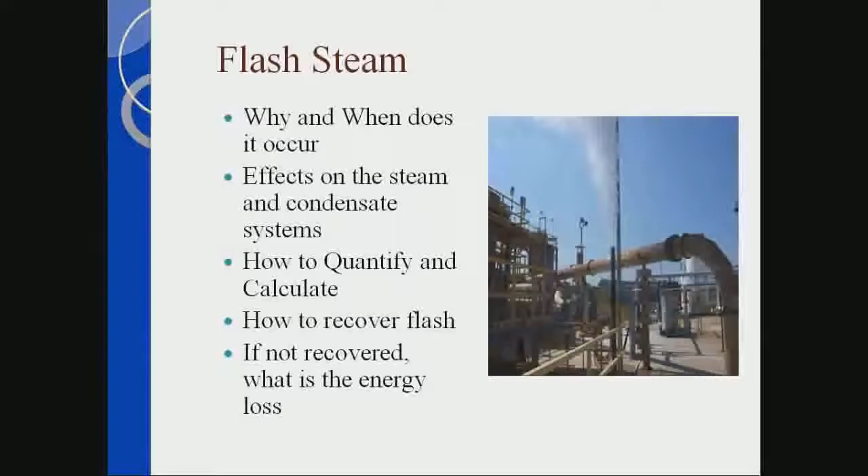Flash occurs—if you look at item 1, that's 100 psi steam coming into the process. 100 psi steam will be 338 degrees. It releases the latent energy, condenses down into condensate, which is also 338 degrees Fahrenheit. Down at point 2 is the condensate going to the steam trap, at 338 degrees. As condensate passes through the orifice of the steam trap, it sees a lower pressure—let's say 0 psig—so the condensate temperature has to come down to 212 degrees.

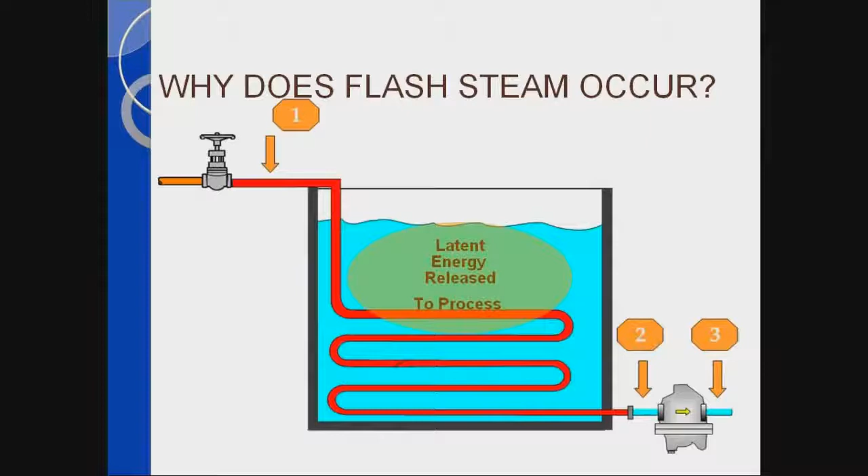How does it get the temperature of the liquid down to 212 degrees? It takes a percentage of the liquid and changes its state from liquid to vapor, or flash steam. For any given saturated steam or condensate pressure, there can only be specific values listed in the steam table—we call it the saturated steam tables. At each lower pressure condition, the heat energy that is released is called flash steam.

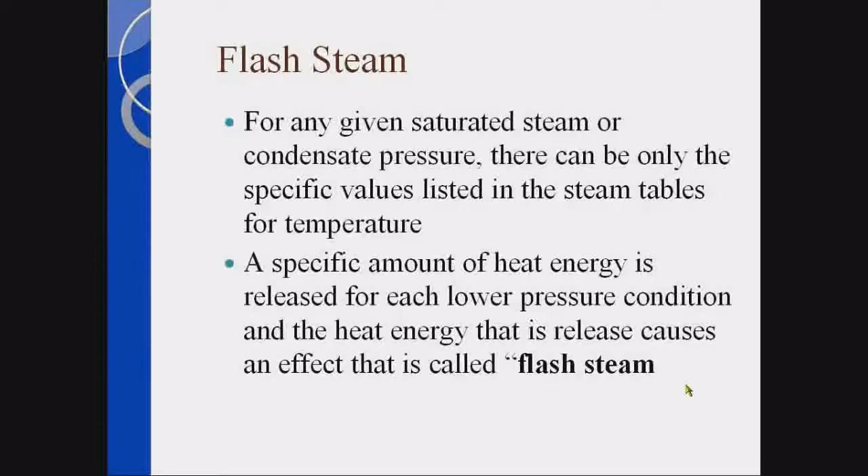Flash steam affects the condensate return line sizing, receiver tank vent sizing, steam system testing, steam trap discharge piping, and energy loss. If loss increases, it increases chemical costs and increases makeup water. And one of the things flash causes is water hammer if condensate return systems are not properly piped.

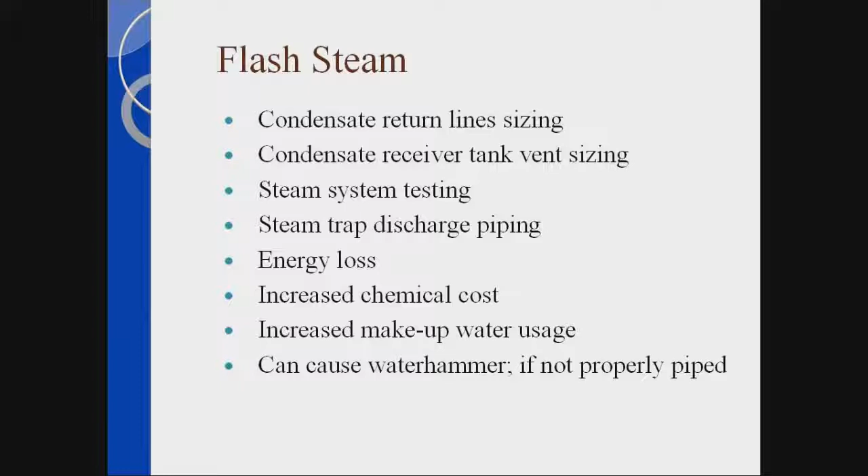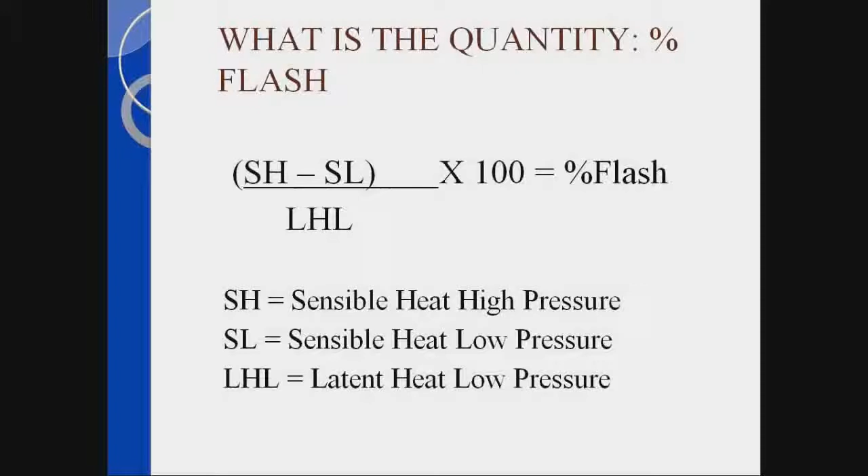How do we come up with the quantity of flash? The simple equation that's been around for years is: SH minus SL, divided by latent heat low, times 100, equals the percentage of flash. The question is, what is SH? That's the sensible heat at high pressure. What's SL? Sensible heat at low pressure. What's LHL? Latent heat low pressure.

Example would be a heat exchanger. We have a control valve that's supplying 100 psi to this heat exchanger. The process is absorbing the latent energy, condenses down into condensate, and the condensate in this condensate piping to the steam trap is 100 psi, or 338 degrees Fahrenheit, discharging into the condensate return line, which is at 0 psi, where the temperature is going to be 212 degrees.

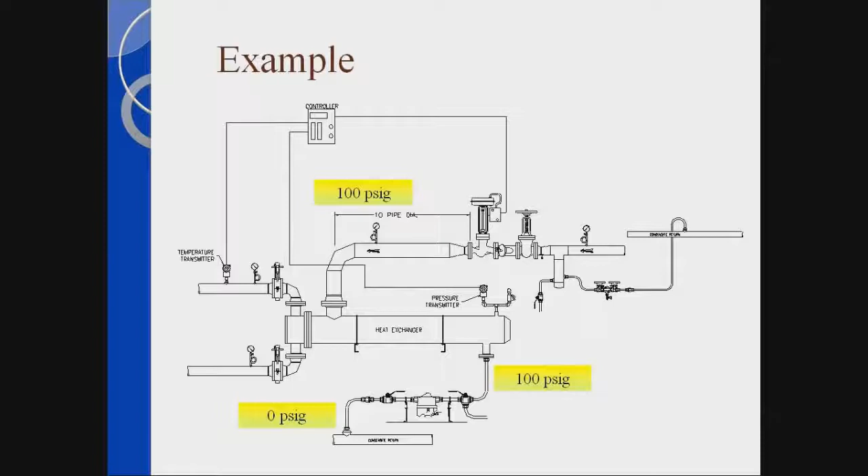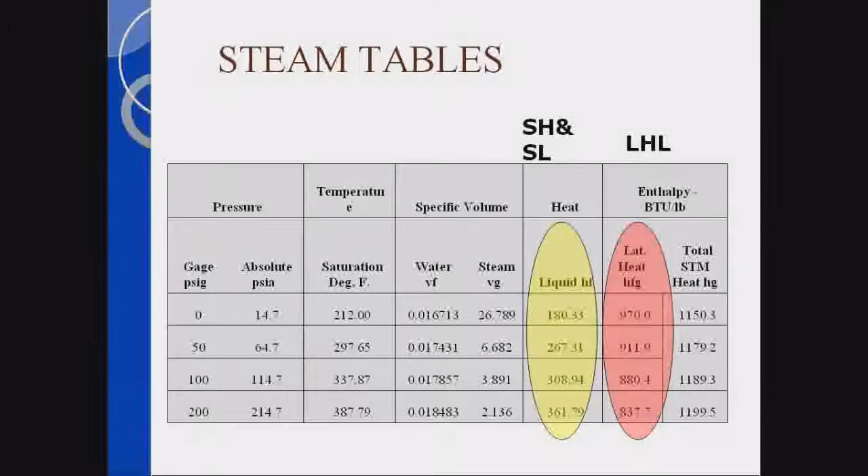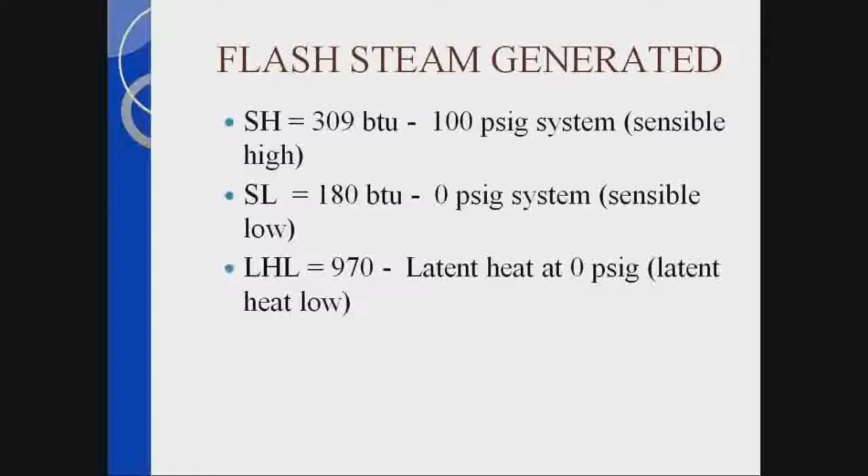If you go to the saturated steam tables and look up the sensible energy of the liquid high, you'll see it's 308 BTU per pound. The sensible low is 180.33 BTU per pound. The latent heat low, LHL, is 970 BTU per pound. Putting this into the equation, SH equals 309 on the high side of the steam trap, and the discharge side is 180 BTU per pound. The latent heat's 970, so dividing that into the equation: 309 minus 180, times 100, divided by 970, equals 13.3%.

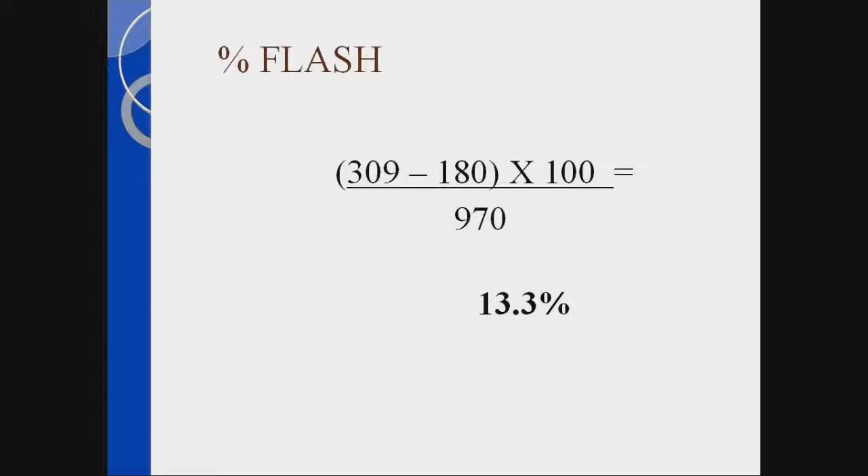What does that mean? If there's 1,000 pounds of condensate flowing through this heat exchanger, 13.3% of the liquid will change state, or 133 pounds of condensate will become flash steam. The other thing to remember is if condensate's passing into an atmospheric system, the flash steam is going to expand somewhere around 1,600 times. Therefore, we have to make sure we compensate the return system for the amount of flash that's going to occur.

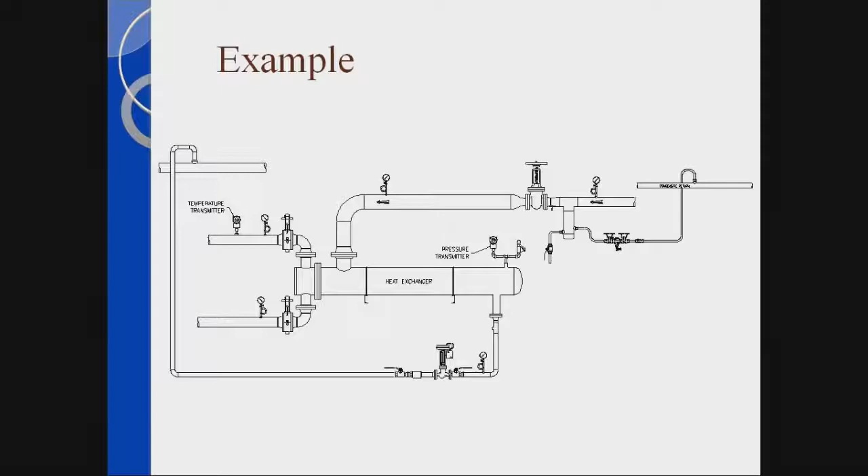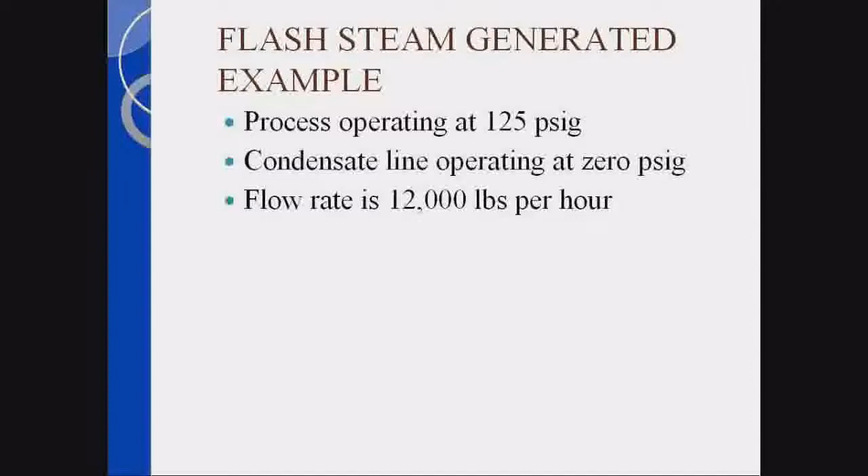Example: here is a process coming in. The steam's coming into this process, going through a control valve and being raised up to the condensate return line. This example is operating at 125 psi. The condensate line is operating at 0 psi G. The flow rate's 12,000 pounds per hour. Going through the calculations again: the process consumption is 12,000 pounds, the process steam pressure is 125 psi G, the steam load is modulating, and the condensate return line pressure is 0. I go to the saturated steam table.

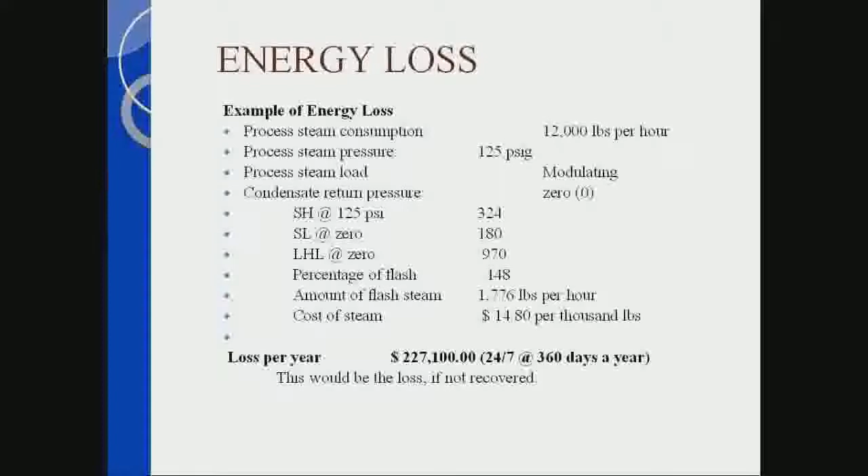SH equals 324 BTU per pound, SL equals 180 BTU per pound, LHL equals 970 BTU per pound. The percentage of flash is 0.148. The amount of flash that's going to occur is 1,776 pounds per hour. Now, if I do not recover that, and the cost of steam is say $14.80 per 1,000 pounds, and this loss goes on 24/7 at 360 days a year, that loss is $227,000 if the flash steam is not recovered. Therefore, these dollar amounts become very high very fast if we're not proactive with recovering flash.

Example here: this is 2,800 pounds per hour, and let's say the cost of steam is $10, operating 24 hours a day times 360 days. This loss right here is $241,920. Unfortunately, we go by facilities all the time, and this venting is quite normal, unfortunately, and the losses are pretty substantial.

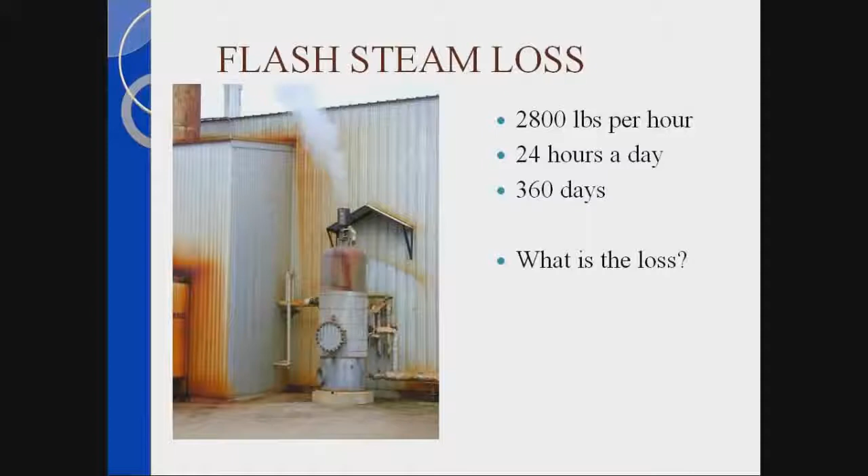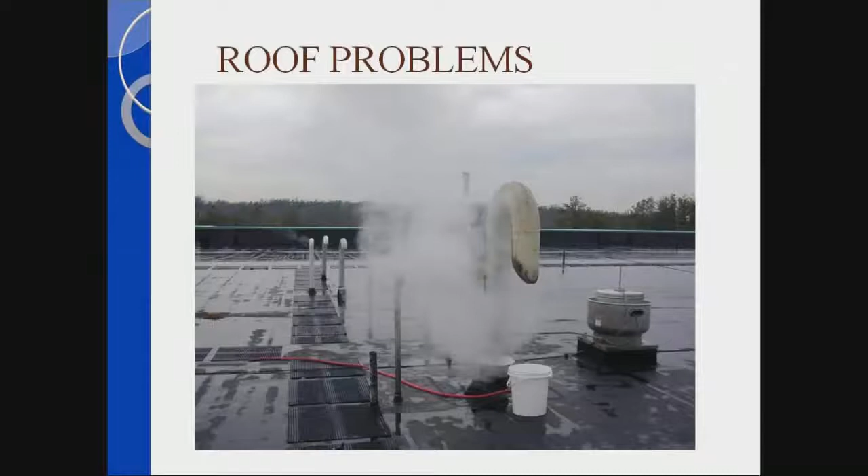Or we have these — no matter where I travel, there's always somebody out there selling pails to collect the condensate that's dripping from leaks or flash steam, like this example. The problem is it causes roof problems if we don't take care of the flash steam losses. In modulating process applications, we have to deal with flash, so we'll talk a little more about that. What are the other problems? Chemical, increased makeup water, damage to roof, ice problems, and safety.

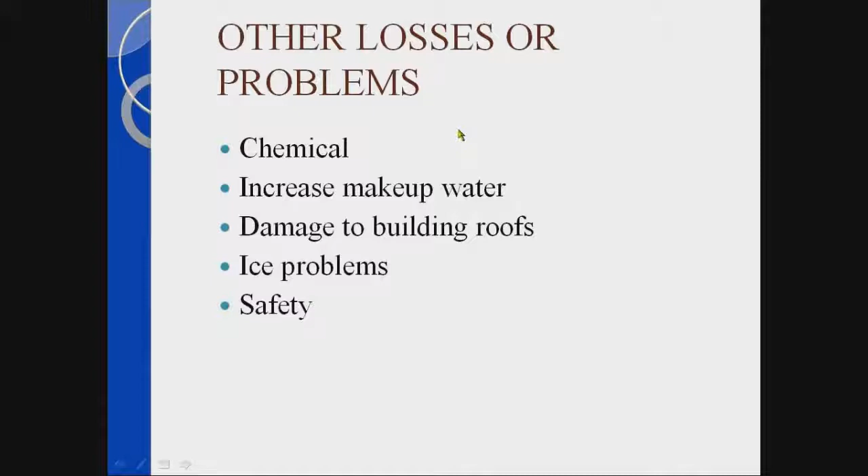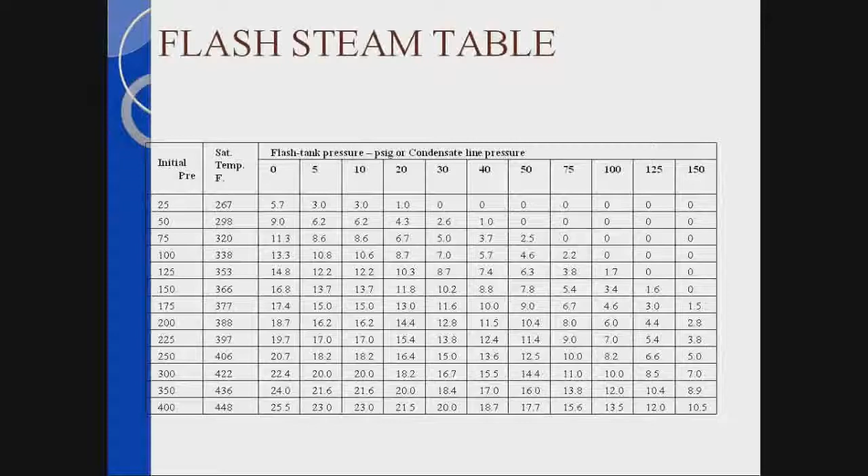We talked about how we've got to have flash. So how do we recover the flash? Say it costs me $200-something thousand — great, how do I recover it? It's a great question. There are two types of systems in steam systems: one is called non-modulating steam process, and the other is modulating. The first one I want to talk about is non-modulating.

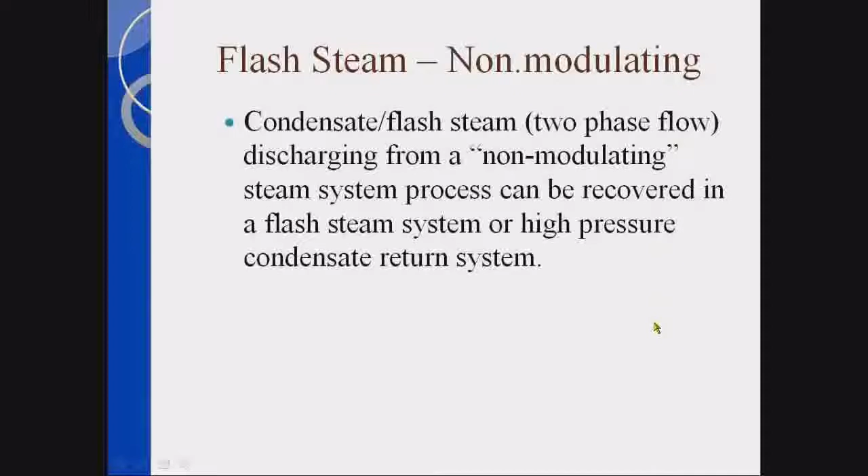That valve is not a control valve. That is an on-off valve. So when the process is operating, that valve is fully open, and the steam is not modulated to the process.

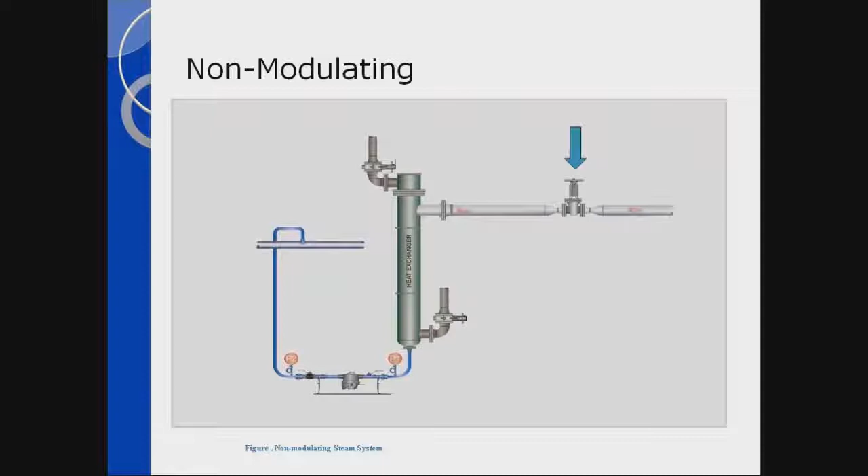In these cases, if you look down at the bottom of the print where we show a steam trap, P1 and P2, we're always guaranteed a differential across the steam trap because the steam pressure is not modulating. Therefore, the condensate return line shown there can be at some elevated pressure, but it has to be lower than the supply pressure. The condensate can be sent back to the boiler plant under pressure.

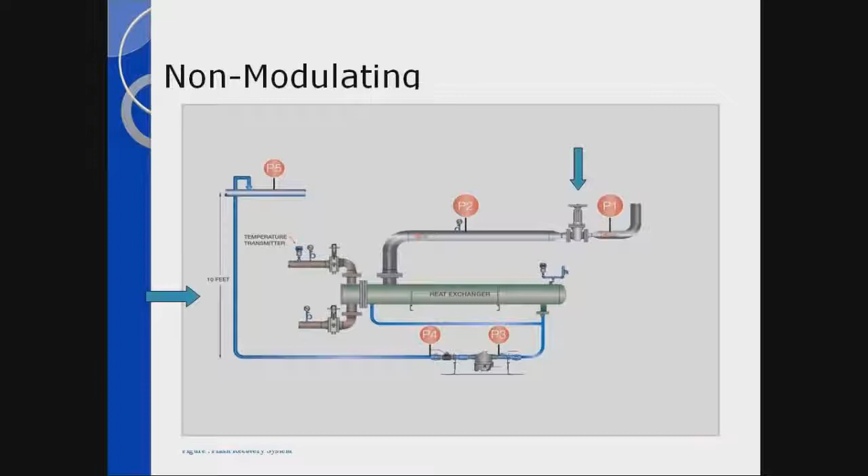With these devices we can elevate the condensate up in the air. On the left-hand side, you see we elevate 10 feet. Just a rule of thumb, every foot rise is half a psi, but I have plenty of differential to work with because we're not modulating the steam.

Flash steam from the condensate discharge can be directed into another low-pressure steam user. We call it cascading. With a high-pressure condensate return system, the percentage of flash is greatly reduced. The higher the pressure in the return system, the lower the amount of flash that will occur. Therefore, in plants where we go to high-pressure return systems, we reduce the amount of flash and elevate the sensible energy in the condensate.

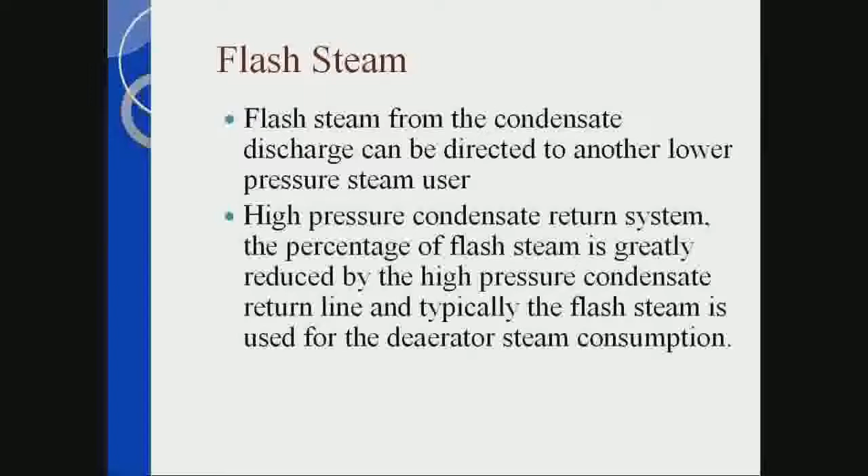With this type of operation, we typically do not go back to the deaerator, we go back to a high-pressure receiver and it's directed back into the boiler. Remember, if you do not allow the condensate to be exposed to the atmosphere, you do not have to go through the deaeration process.

Non-modulating flows, where can they be from? One great example is steam tracing systems. They do not modulate the steam to steam tracing. Drip leg steam traps, specifically like a high pressure 200 psi, we take that condensate and direct it back into a high pressure receiver or to the storage side of the deaerator. Another example is process unit heaters, process heaters, reboilers, corrugators.

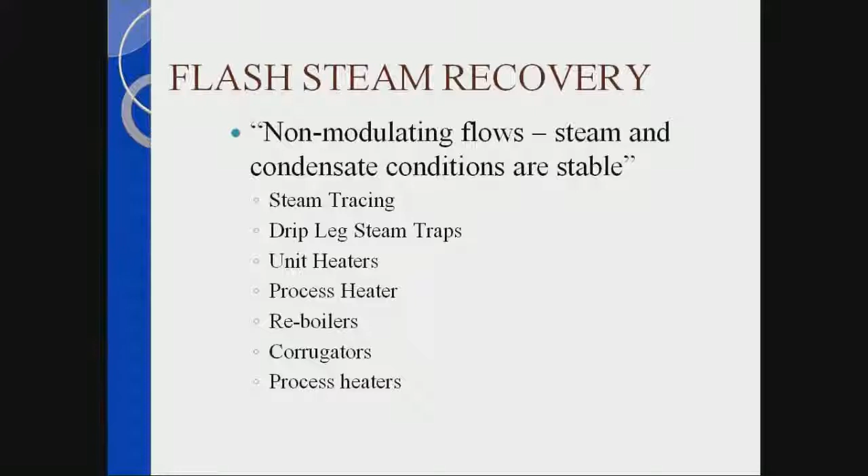All these are examples of steam flows that do not modulate, which we can direct back into a pressurized return system or a cascade system. Directing these flows back into a cascade system or a thermocompressor system, we must basically separate the condensate from the flash. That's why we put in flash tanks. Flash tanks have to be properly sized and installed.

The thing is, where do I take that flash steam? I can take the flash steam to a heat exchanger to heat water, air, or any other liquid, or direct it into processes with a lower pressure steam requirement. The thing about the flash tank is the separation of condensate and flash.

The other thing is we control the flashing process by the pressure in the flash tank. Also, in the calculations of a flash tank, you need to allow enough space for the flash to occur, and there are certain calculations we go through to do that. The other thing is to reduce the velocity of flash steam to ensure no condensate carryover with the flash. We have to make sure the flash does not carry any condensate with it or reduce the steam quality to the process. This all comes into the calculation process.

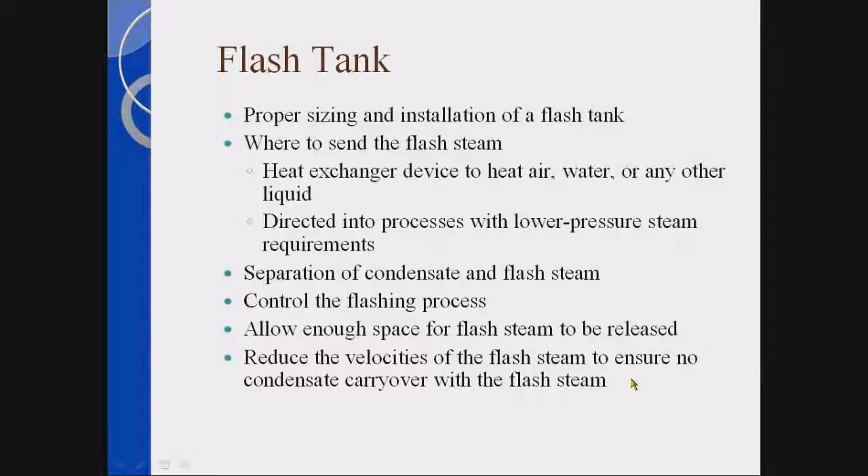Tanks can be mounted vertically or horizontal. The most important dimension in the design of a flash tank is the internal diameter. Again, it needs to be large enough to ensure low discharge velocities of flash to minimize condensate carryover, and to have enough surface area to release the flash from the condensate.

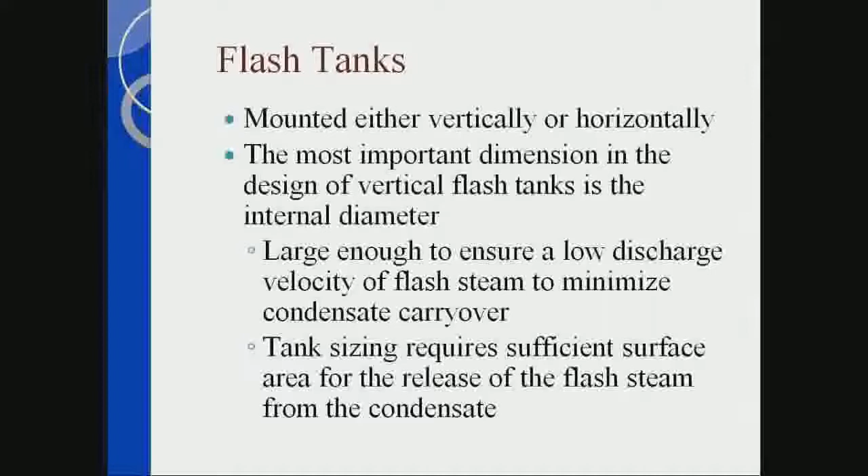One of the things that comes up quite a bit: if the condensate line is properly sized, then we'll get separation of the flash from the condensate in the condensate return system. Unfortunately, most condensate lines are undersized instead of being properly sized or oversized. So therefore, we have to rely on the flash tank to do the separation of the flash from the condensate inside the tank.

The other thing that needs to be looked at is the outlet velocities of the flash tank. Make sure we're not exceeding 3,000 feet per minute. That means we are dropping out the condensate from the flash. Again, a high percentage of condensate in industrial operations is not properly sized. Therefore, the flash tank has to provide the proper area for the condensate to release the flash steam.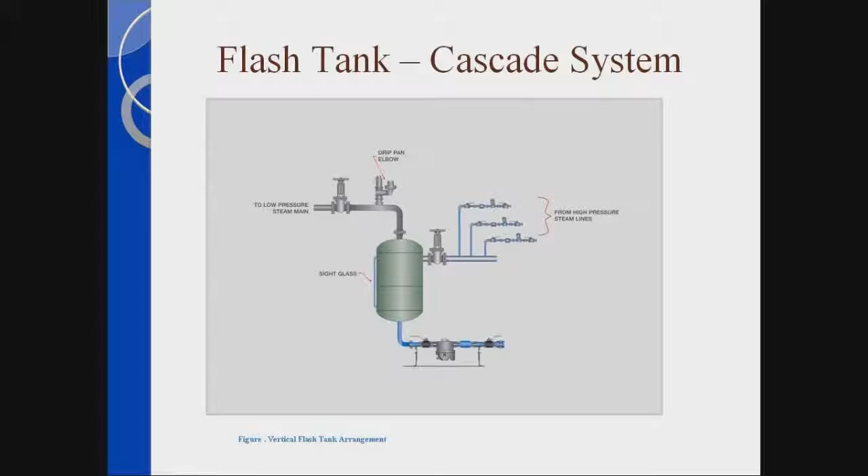Here's a picture showing a flash tank. As you can see, it's a smaller tank with a steam trap piped off the side of it. The flash is exiting the top part of the tank.

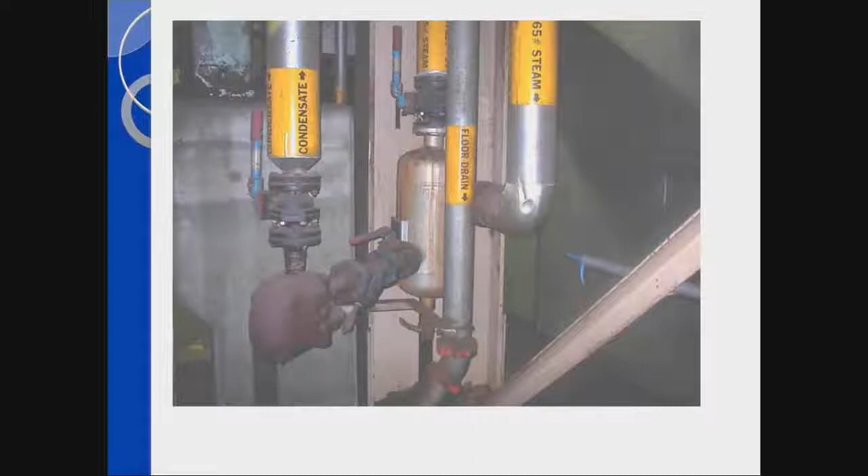Here's a larger tank assembly. This is taking volumes in about 40,000 pounds per hour, and the flash is exiting at the top here. The condensate, as you can see on the lower left-hand corner of the slide, is being pumped back to the boiler plant.

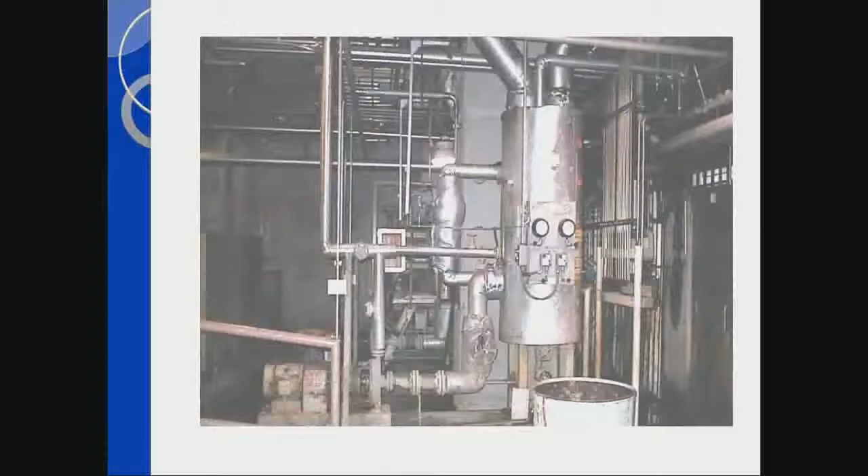The other thing, a question always comes up in comments from plants: we don't have use for low pressure steam. What can we do? The thing is, with low pressure systems, we can thermal compress the steam. Therefore, we can take the low pressure steam and thermal compress it to a higher usable steam pressure.

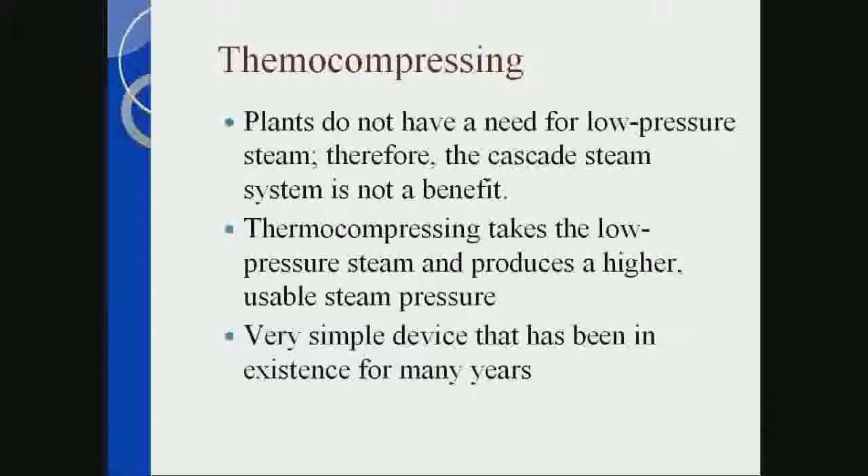A lot of times I hear a comment, is this new? It's been in existence for 60, 70 years. Certain industries used it for many, many years. Other industries have not used it.

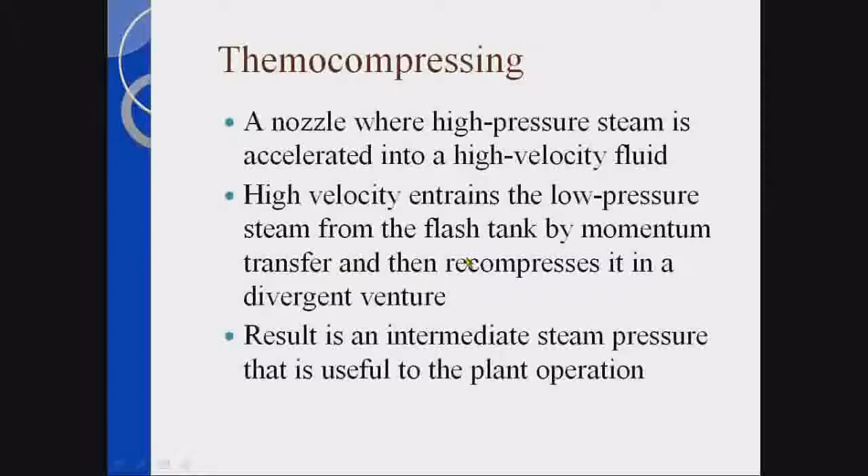The thing with the thermal compressor is basically a nozzle where high pressure steam is accelerated into a high velocity fluid. High velocity entrains the low pressure steam from the flash tank by momentum transfer, and then recompresses it into a divergent venturi. The result is an intermediate pressure that's useful to the plant operation.

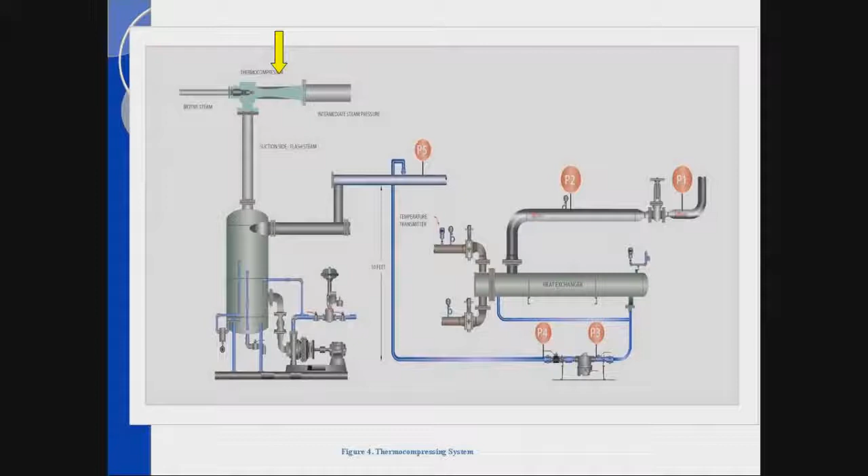It's a great way to make usable flash when I do not have the ability to use low pressure steam. The roadmap we want to follow is to define all non-modulating steam processes. Determine whether we can cascade it or thermal compress it or take the steam to a condenser type system, but recover the flash steam. Remember, if I'm venting the steam to atmosphere, it could be $200, $300, could be $700,000 a year.

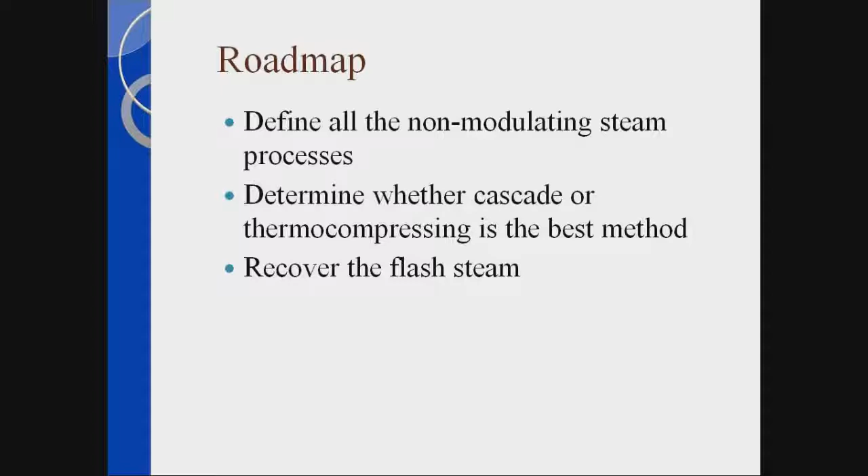Can't do that today. The other steam process I was talking about is modulating flows. Steam and condensate conditions will change and are not at a steady state. The modulating system has a modulating steam control valve to the process because the intent is to maintain temperature of the process.

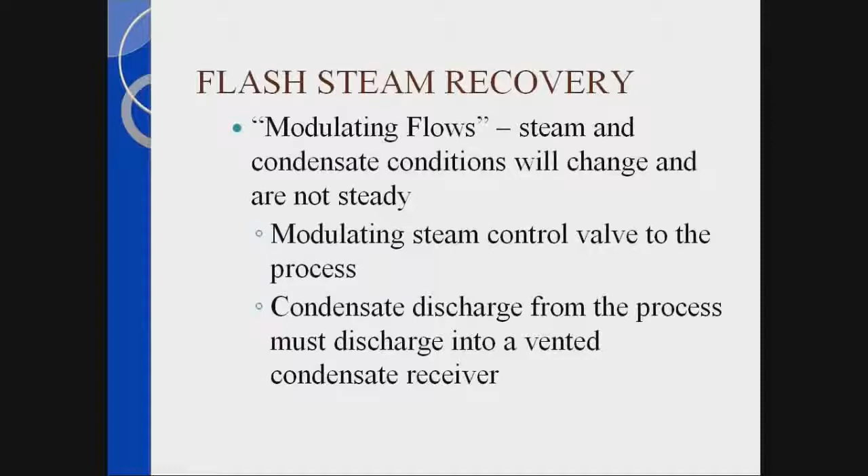Condensate discharge from the process must discharge into a vented condensate receiver. In process applications, the control valve is going to travel anywhere from 0 to 100%. Really it's controlling pressure of the steam to the process to maintain a process set condition. The steam trap or condensate control drain device does need differential. So as I come down to low pressures, I cannot afford to have back pressure onto those drain devices.

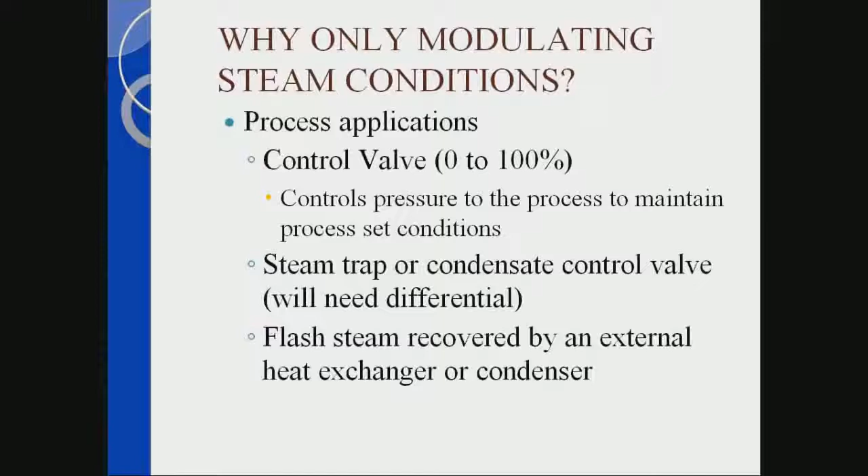The problem with this is flash steam recovery has to be done by an external heat exchanger, or what we call a condenser.

An example is on here. This is a modulating load. As you can see, P1, P2 - the yellow arrow is showing the control valve. That control valve can modulate anywhere from 0 to 100%. If it modulates down to, say, 5%, then P3's pressure is going to change. If it opens to 50%, P3, which is the inlet to the steam trap down to the lower part of the slide, will change.

The thing to remember is that coming out of the steam trap, or P4, going to the condensate header, which is P5 - P5 must be 0 PSI. To make this process work, P5 has to be 0 PSI. One of the problems we find in process applications is pressure at P5, which puts pressure at P4, and we lose differential when the valve modulates down, which will back up condensate and cause water hammer. So remember, when you're putting a system in, P5 must equal 0 PSI.

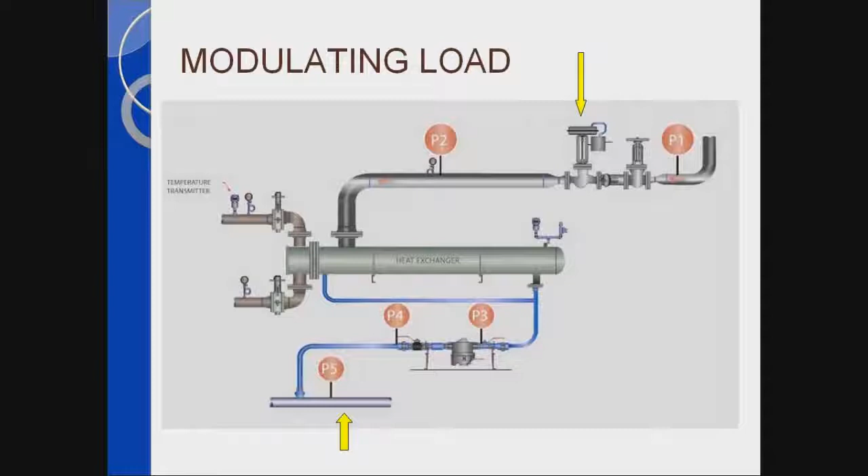Therefore, we bring the condensate into a tank, and these tanks have different names depending on the industry. One industry calls them condensate tanks, another calls them condensate hogs, another calls them flash tanks. There really are flash tank, condensate tank - same thing.

We're doing the same thing as in non-modulating loads, allowing the condensate to be separated and the flash to be vented. Different than the flash tank we discussed, the outlet velocities have to be very low to make sure we get no carryover condensate going out the vent. We also have to make sure we have separation - we want condensate to drop to the bottom of the tank and be recovered or pumped back to the boiler plant.

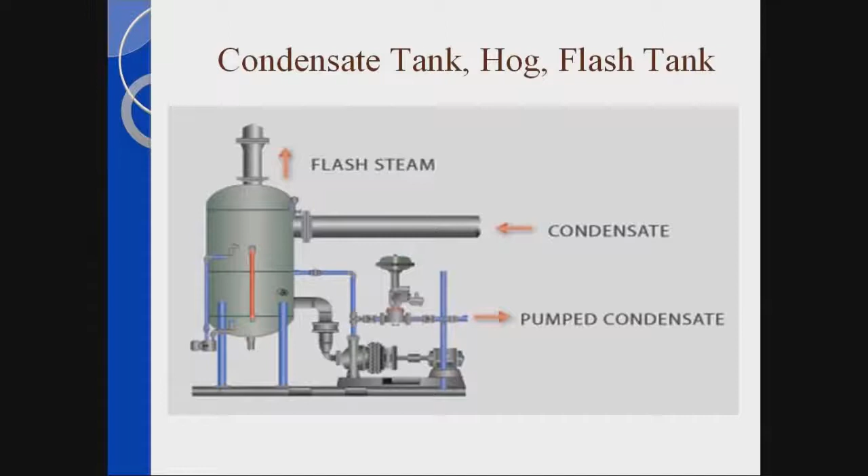To recover this becomes a little more difficult, because this tank pressure, as shown in this diagram, has to be 0 psi. So if it's 0 psi, I cannot cascade it, and it's very difficult to thermocompress it. Therefore, to deal with it, I go into a condenser.

The condenser takes process fluids into basically a shell and tube heat exchanger, designed specifically for a condenser application. The flash steam is allowed to flow up into the condenser. The latent energy is absorbed by the process. Condensate is formed, and drains right back into the tank. The end result is that flash steam is not vented to atmosphere - at the top of this configuration, we'd want to see no steam being vented.

Now, condensate can be pumped, as shown here, through variable speed drive pumps or control valve pump applications like this, maintaining level into the tank. But remember, the same philosophy in condensate tanks as we apply in flash tanks is the same calculations - we want separation, we want the flash to be separated and vented at very low velocities.

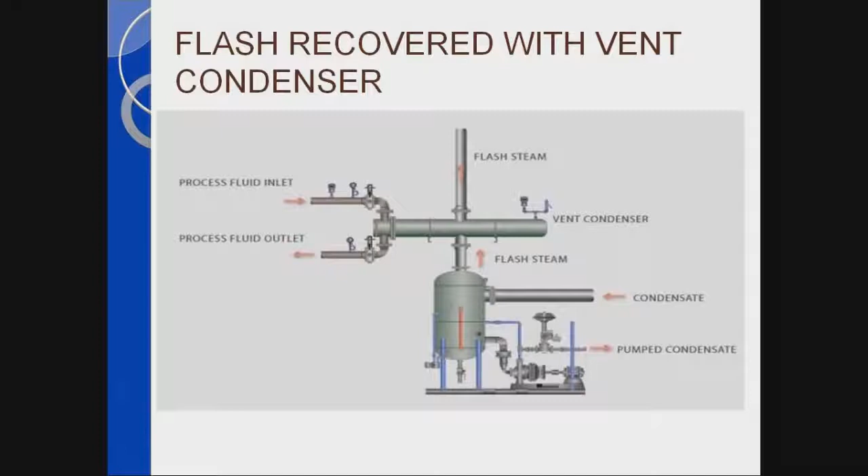The other thing we apply, specifically in areas with heating needs, the northern climates, is to put in an air heater, simply shown here. We allow the flash to come into this air heater, and we absorb the flash steam by heating up the air. With these units, we've done process air heaters too, where we've taken properly sized coils to condense down the flash and preheat the air for the process.

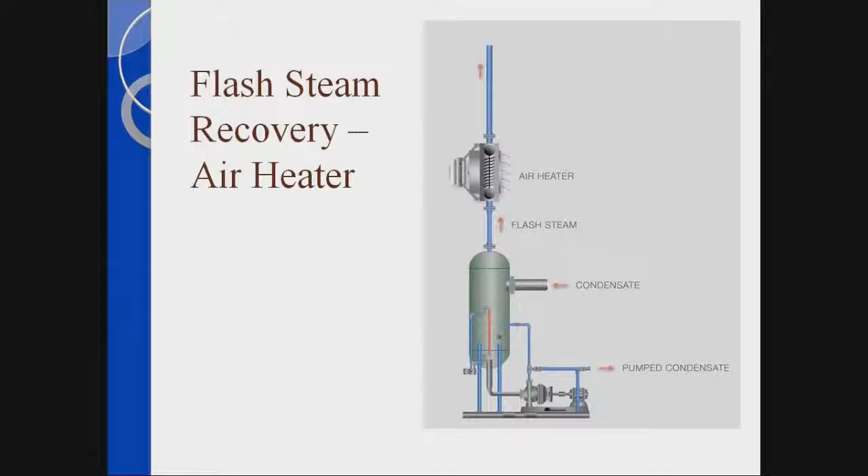I'll give you an example. I was at a facility last week. We were in a cool area, down in one production area, and the vent for the condensate tank system was right there. By just putting in a simple air heater, as shown in this print, we can collect that flash, or recover that flash energy, and provide heat for the building. They said the heating is on for about 185 days a year, which is a lot better than heating the outside air, which is no use to anyone. So this is just another way of accomplishing recovery of the flash steam.

Very simple method. Kelly, without interrupting you too much here, how much steam is vented? How much flash is vented to atmosphere? Just if you had to take a guess, if you walked into your average plant, would you expect to find it or not?

Are they in North America? In North America, probably more than 80% of the plants are venting steam. Wow, really, that's quite high. Yes. All right, I'll let you continue. If you go to other parts of the world, it depends on the country, and that percentage drops dramatically.

But anyway, when you come into facilities, the discussion I was having this morning is, I need a heat sink - what is a heat sink? Something I can take the energy of that flash going to atmosphere and absorb it. One is domestic water, for showers or things like that, depending on the campus setting. You can use it for heating up water, process waters - for example, in the paper industry, we heat up white water. Great heat sink - you need to heat tons of water, so it becomes very viable to do it that way. Process fluids, any fluid I have to heat up to some temperature, 190 degrees, it's great.

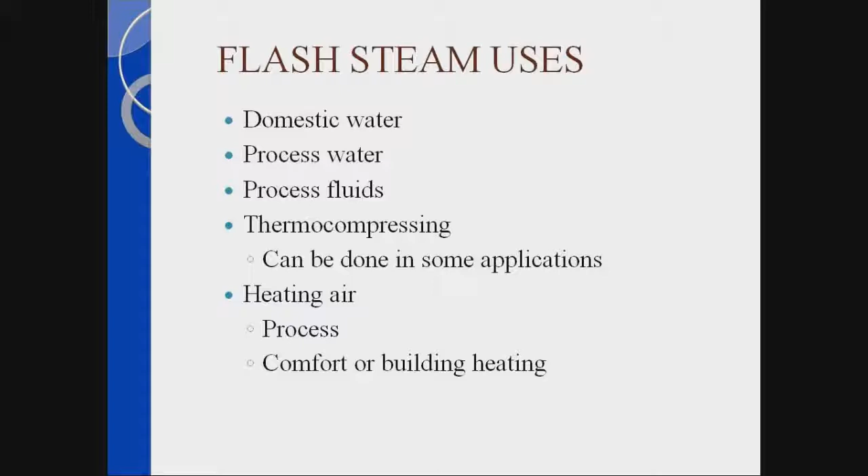The other thing is heating up air. A lot of times we think condensers, we've got to heat up a liquid. Think about heating air for a process, or even heating air for building heating and comfort. Usually the condensers or condensate tanks are sitting in areas where people are, in the production areas, where we can heat up air. So it's quite viable.

Kelly, can I interrupt you again? We have a question. Sure. Somebody was asking, Gary—actually, other Gary, not me—is there a flash tank or other heat collection device that you can attach to the vent line that is set for oxygen removal?

I didn't catch that, you want to repeat it? They want to know if you can get a flash tank or collection device that also will remove... Oh, on the DA, he's saying. Oh yeah, great, great question. See, I didn't even understand the question at first. Yeah, I understand his question now. That's great, all right. It's a great point, thank you for bringing that up.

The only place that we say it's acceptable for steam to be vented to the atmosphere is off the deaerator. You have to vent it—if you don't know the volume, you have to vent 1/10 of 1% of the volume of the deaerator to atmosphere to make sure you're getting rid of non-condensable gases out of the deaeration process.

Now, years ago—unfortunately I go back a few years, maybe too many—there are designs of old deaerators that I walk into that already have the condenser in there. Somewhere along the line we just forgot to do that. But for sure it's a great application, because we come off of there and put in a condenser. The heat sink is the makeup water going into the deaerator, so we pick up those BTUs and it goes into the deaerator. Even today, we don't even allow the vent off the deaerator to just happen. But remember, with the condenser, it has to be properly sized so I don't create vacuum and keep the non-condensables inside the deaerator. I want to make sure I'm venting the non-condensable gases out of the deaerator.

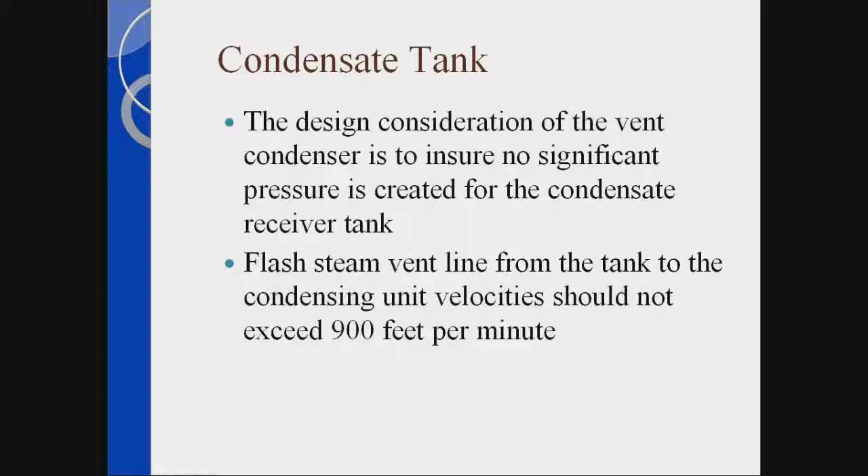The flash steam vent line from the tank to the condensing unit—velocity should not exceed 900 feet per minute. The reason we're very specific on that is the flash steam is traveling in an upward flow, and we're condensing it, and that condensate is going to be dropping down through that vapor flow—we want it to drop. We don't want any velocity to keep the condensate going up into the condenser. It's a very important fact, and a lot of times people forget about that.

The success of the installation is information—the more information you have, the more success you have. One of the things is understanding maximum flow rates. Everyone says, I need the maximum, and that's great, we need that. But the other thing is minimum flow rates. Unfortunately, most of the time we won't get the maximum flow rate, but 100% of the time we get to the minimum flow rate. And if we don't factor that into our calculations, it can create problems.

Same thing with cooling flow rates—what's my max? I have to design the unit for the max. But as critical as max, I need to know the minimum flow rate I'm probably going to hit. If I don't have enough cooling to condense down the flash steam, the last thing I want to do is pick up so much BTUs in the cooling fluid that I change state from liquid to vapor on the cooling side, creating severe water hammer—basically turning a condenser into a boiler.

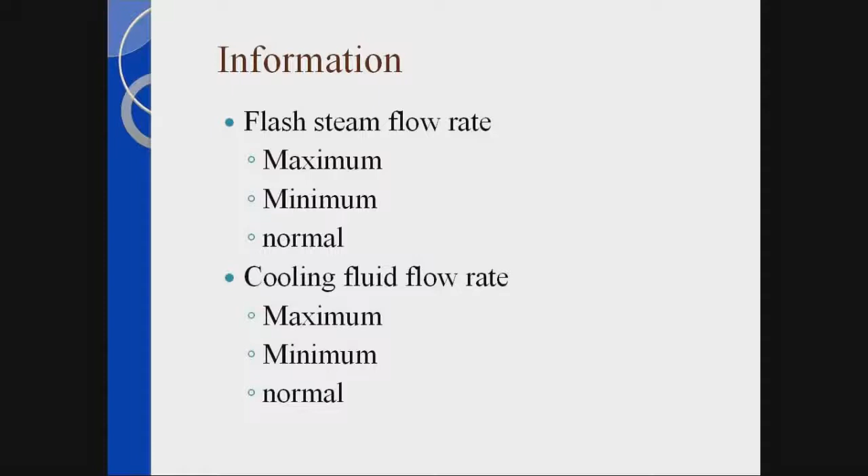So in applications where our flow rates for the heat sink or cooling could be questionable, we have to put in bypasses around the condenser to make sure that we do not create issues with the condenser. It's just part of the things that we have to look out for when we design the system.

The other thing is, I talked about effects, and I can go into all the effects onto the system that flash does cause us issues.

One example: I take a steam line, 6,000 pounds per hour. The condensate line is also 6,000 pounds per hour. 1 pound of steam is 1 pound of condensate. I need to know the percentage of liquid and the percentage of vapor. If I go and look at the system specifically on liquid, it's going to be 1 inch. If I go and recalculate for a condensate line to be liquid and vapor, it's 2.5 inches. You see the difference in the condensate line.

And the thing about it is, one of the biggest issues that we see week after week at facilities is condensate lines are not properly sized. That's a big, big factor. Remember, condensate lines are two-phase flow. Size them for liquid and flash steam.

Here's your roadmap. Determine the modulating versus non-modulating, which I said before. Set a roadmap for recovering flash. Tell people it took years to get where you're at. It's going to take a couple of years to go and get back.

But for applications, one of the things I was in a discussion about this morning, a plant saying, I need a 2-year payback. Recovering flash usually has less than a 6-month payback. It's one of those items that has a great payback.